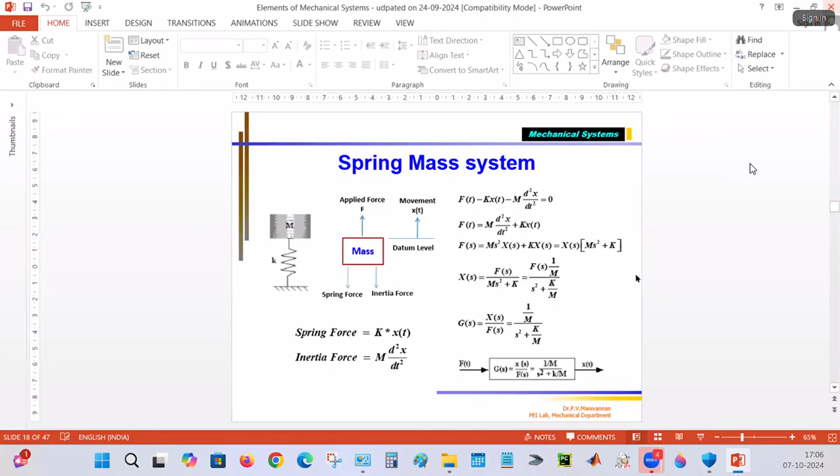Sir, can you show us the previous slides also? This is spring and mass system, then spring and damper system we saw, then this is spring mass damper system. Am I correct? Yes sir, this is the last slide we saw. We just discussed this around the end of last week.

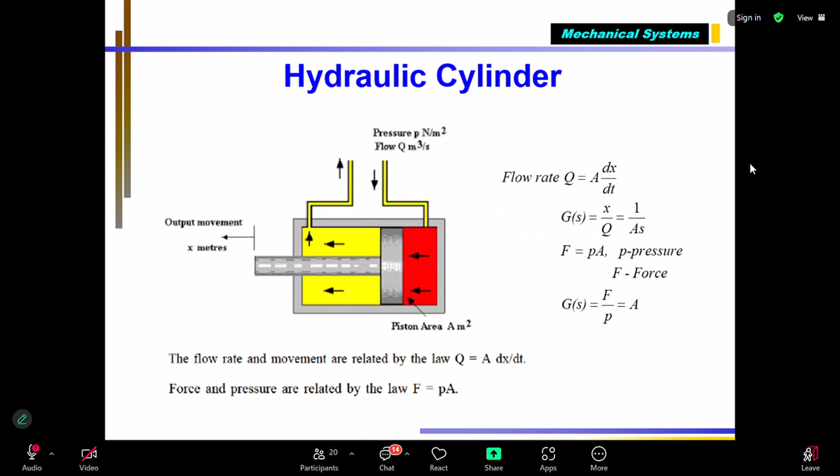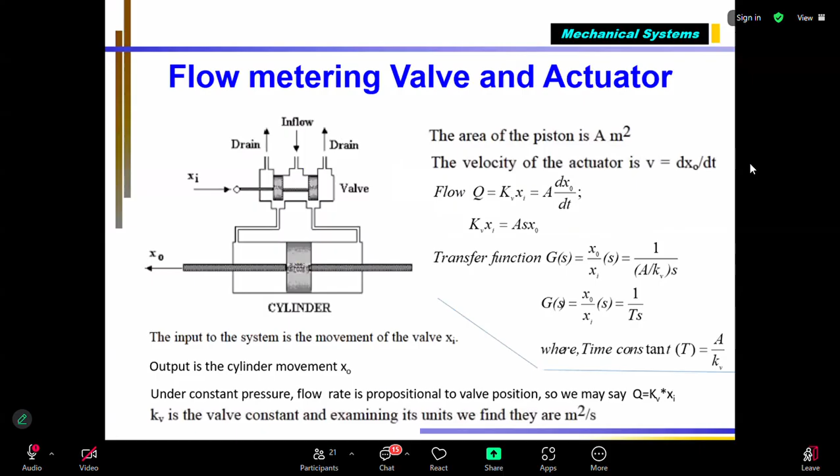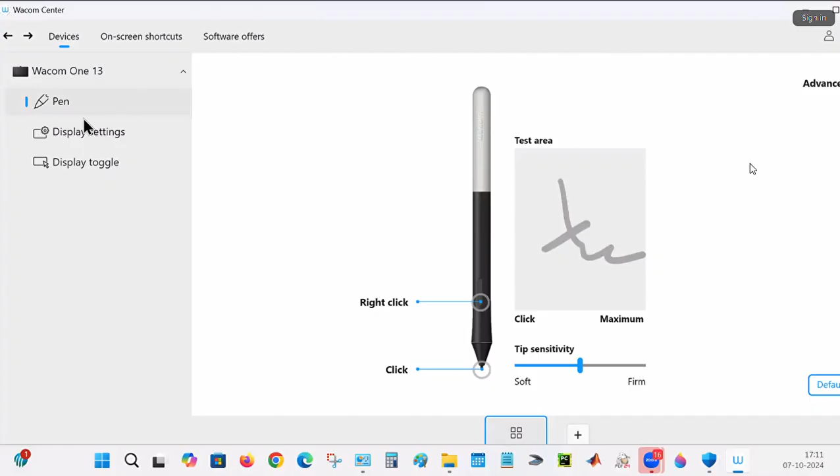Just 1 minute, my pen is not working. Let me close and come back. Yeah, it's working, fine.

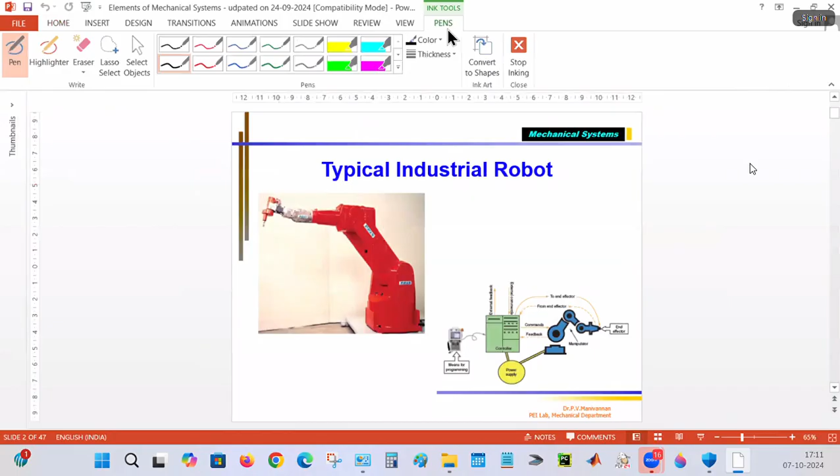The whole idea of the last 4-5 classes is how to model a mechanical system, starting from the basic elements of a mechanical system: spring, mass, and damping element. As I told you many times, if I take a machine and disassemble it into individual final components like bolt, nut, connecting rod, each component can be represented as any one of these - a spring element, mass element, or damping element. We already know the transfer function mathematical model for the spring element, so here we have 3 elements already.

We saw there are 3 elements: one is a spring element with stiffness, a mass element with mass M, and a damping element with damping constant Kd. They are connected in series, and you are applying a force, for example pulling - tensile or compressive force. Accordingly the spring will get compressed, and in the damper, the piston will move from the current location to a new location. Of course the mass will move along with this. So when I apply a force F of t as the input, shown here, the position of the mass element is the output - this is my output, this is my input.

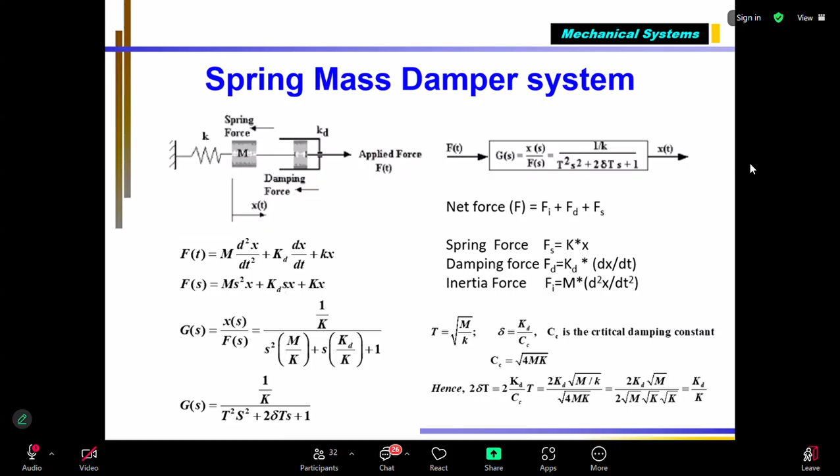Sorry, some small issue there. Visible now? Yes sir, yes sir, yes sir. Okay, so this is called a damping ratio.

This is called damping ratio, not damping constant. Damping constant is the property of the damper that will be given by the manufacturer, or you can find it through an equation. But damping ratio is different. This is called damping ratio.

Damping ratio depends upon all three parameters. You can see here, damping ratio equals KD divided by CC. CC equals root of 4MK. Mass of the system, sprung mass, stiffness, and also the damper constant, damping constant of the damper - all those things decide it.

This is what you will be asked to compute, and then find out the transfer function. You substitute, and you will still get in terms of, say for example, K equal to this much. I say K equal to, say 100, correct? Then M equal to 1000. K equal to this one. The KD equal to say 50 or something, then you can substitute in this equation.

T already we know, T equal to root of M divided by this one. I will substitute here with 100 and here I will substitute with K. Sorry, yeah, first this is 1000. This is 100 and you will find T.

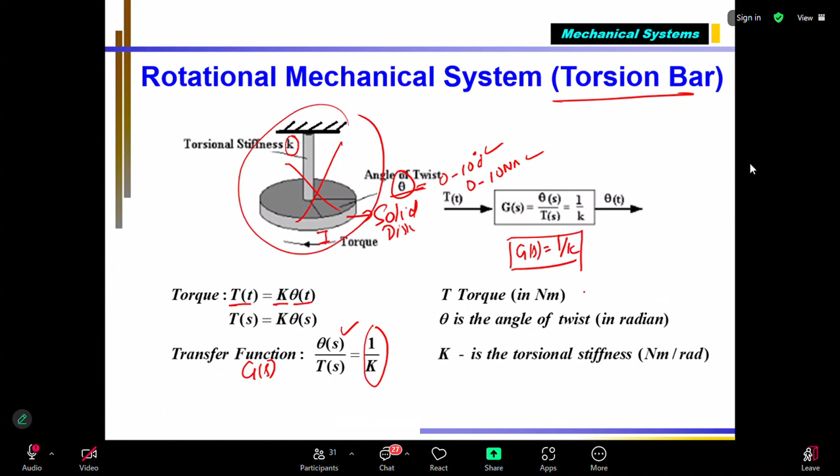This is another example for rotating system. Another one what I want to talk about is torsional damper. Torsional damper is like a damper, and it's a piston type damper. I think in the previous class we talked about piston type damper, correct?

Sir, yes sir. Right, so this is a piston. Yes, air piston type damper sir. Talked about oil type as well. Air also sir, oil also you have. Air can be anything, nothing but a piston moving inside a closed cylinder with a small gap on the periphery.

Correct, these are the gap, and this is filled with oil. If piston input force is given, correct, the fluid from this will come here. Then only the piston could go, because it's filled with oil. Correct, it's incompressible. Air also you can compress only to some extent. After that, the fluid from this will flow at a velocity moving from chamber A to chamber B.

When the piston is moving like this, or moving like this, the fluid goes from B to A. Correct? That depends upon the orifice size, the viscosity, and also the area. I've already talked about the equation for all these things, if I remember correctly. Correct? You can get some example in exam, some problems.

Find out what damping force it created, KD, correct? So similar, that is a linear motion. Correct, damper the piston moving. Instead of that, I have a motor connected to this one. When I give a force, for example a servo motor, if I give a voltage to that...

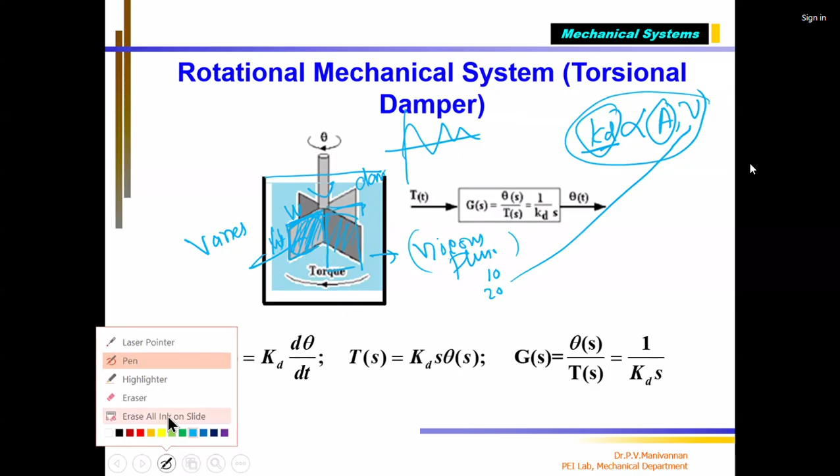Otherwise, if I increase the vane size, make bigger vanes, or add more vanes instead of 4, say 6, the total area gives 8 surfaces or more, and if you add them together, you will get that. If you increase the number of vanes, or make bigger vanes, then KD increases. So this is called the torsional damper, for arresting unwanted oscillations in rotating machines.

So what is the transfer function? The torque is given as the input. KD is the damping constant of the damper. As I told you, KD is proportional to the total area of the vanes, plus also the viscosity.

There's a formula: the torque T equals KD into d by dt of theta, where theta is the angular displacement. This is the time domain equation. Then, I convert by Laplace: T of S equals KD into d by dt, which will become S, and theta t becomes theta S. So this is the mathematical model in the Laplace domain.

This is in time domain. As I've told you many times, the advantage of the Laplace domain is that the differential equation becomes an algebraic equation, so I can easily calculate the transfer function. Transfer function is nothing but output divided by input, which is 1 divided by KD into S. This is the transfer function of the torsional damper.

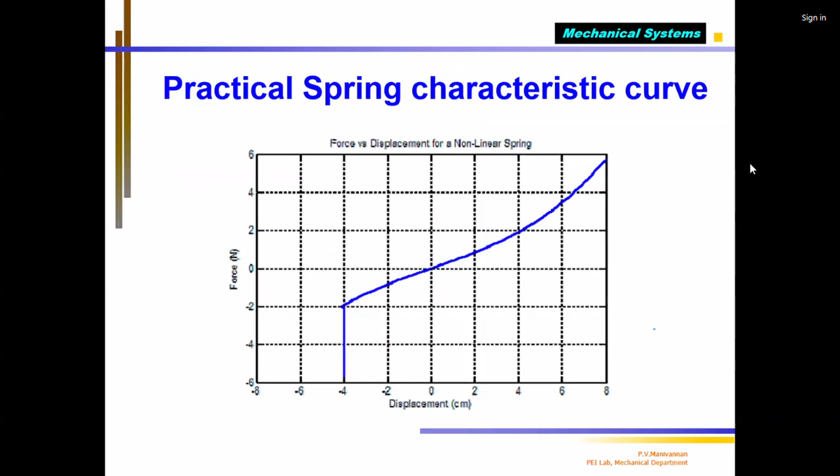Now that we've seen these systems, we started with the mechanical system's basic elements: spring element, mass element, damping element. We saw all those things, their modeling, and individual transfer functions. This is the spring element. Then we talked about the damping element's mathematical model, from which you already got the transfer function.

Then we talked about the mass element. The mass element transfer function we already have there. This is the time domain equation, from which we get the Laplace, and finally the transfer function, output divided by input. Output is displacement divided by input force. This is 1 divided by m s squared, where m is the mass.

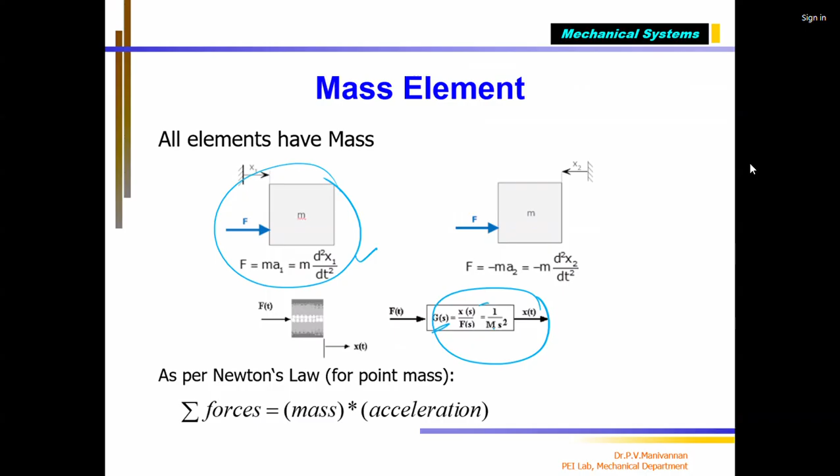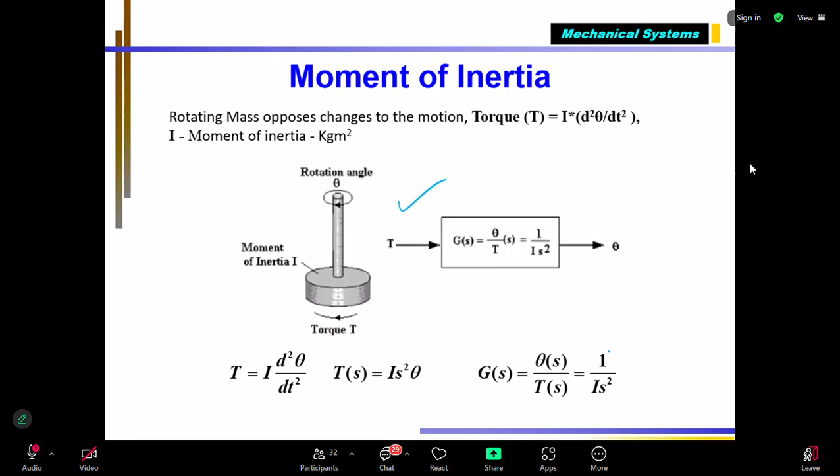So from this, we have built the simple system. Then we also talked about inertia, moment of inertia, and all those things for a rotating machine. So we found the transfer function for the rotating machine, and then we found the equation for this.

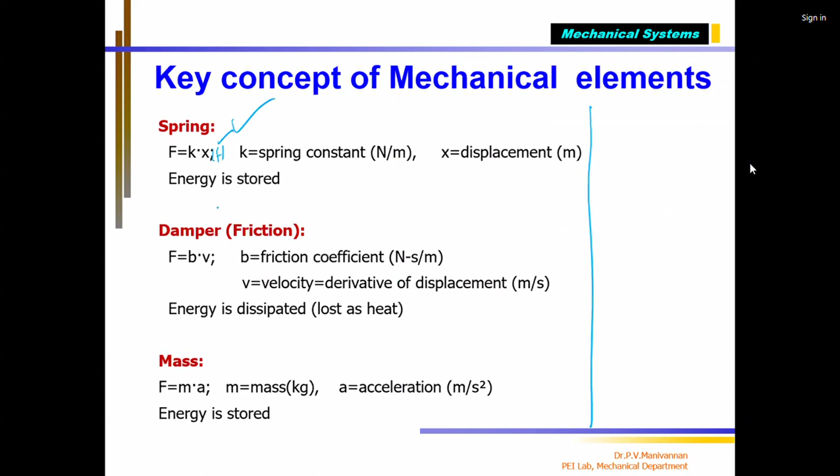Finally, we consolidate: spring element, this is the mathematical model, K into x of t, as already told you, equals f of t, and it is a potential energy storing element. Your damper is a frictional element.

The mathematical model is f of t equal to B... I told you some books use C, some books use KD. Don't worry, they're all the same — different books use different notations for the damping constant: small b, small c, or KD. All are the same. So this model is an energy dissipating element.

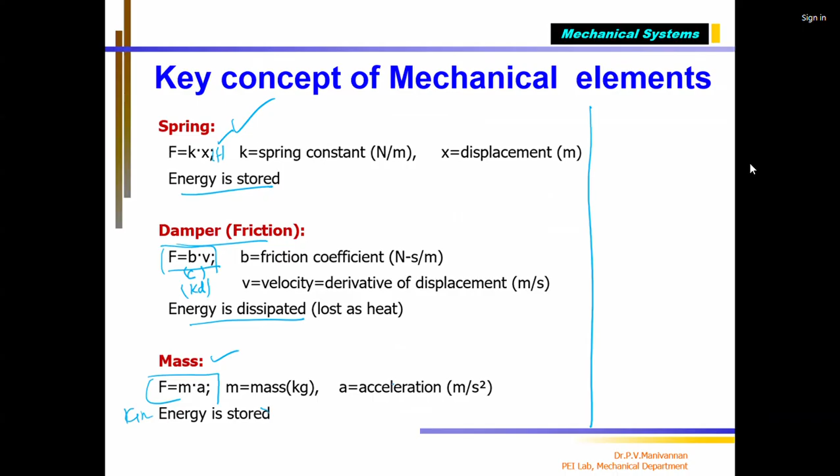Then we saw the mass element, whose mathematical model is m into A, where A is the acceleration and m is the mass of the element. It is a kinetic energy storing device. The transfer function we already saw. From that, we developed a simple mechanical system having only two elements, mass and spring, and how to write its mathematical model.

In time domain equation, this can be written like this. From that, you find the Laplace transform, and then you can write output equal to transfer function multiplied by input. So this is the final transfer function in terms of this system.

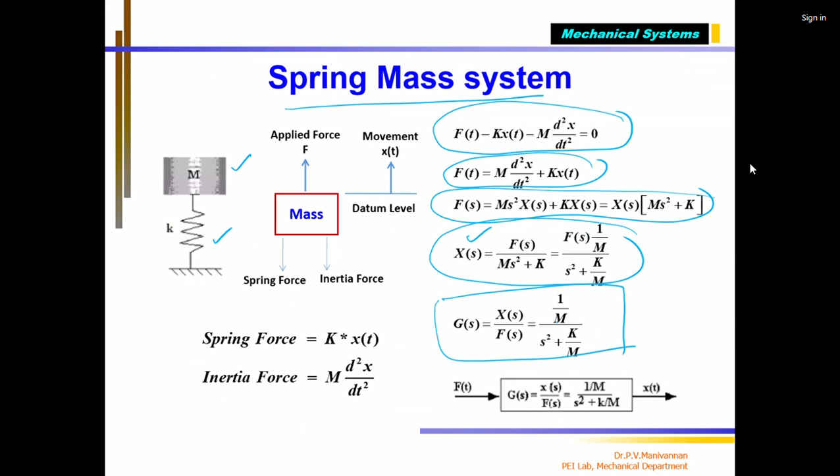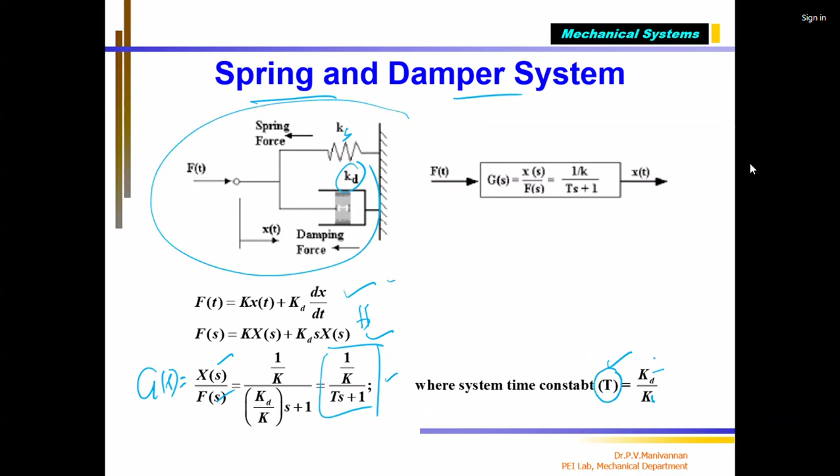Suppose if we were given, draw the correct sketch of a spring damper system, you have to draw this, correct? Write the time domain equation, finally derive the transfer function. When Ks and Kd are given, you can make the transfer function. And if you have to find the time constant of the spring and damper system, you can use the equation to find the time constant, which will be in seconds.

This is called virtual modeling or virtual simulation. What is the advantage? This is called the mechatronic way of designing a system without spending money or time in making a physical system. I will optimize the product, correct?

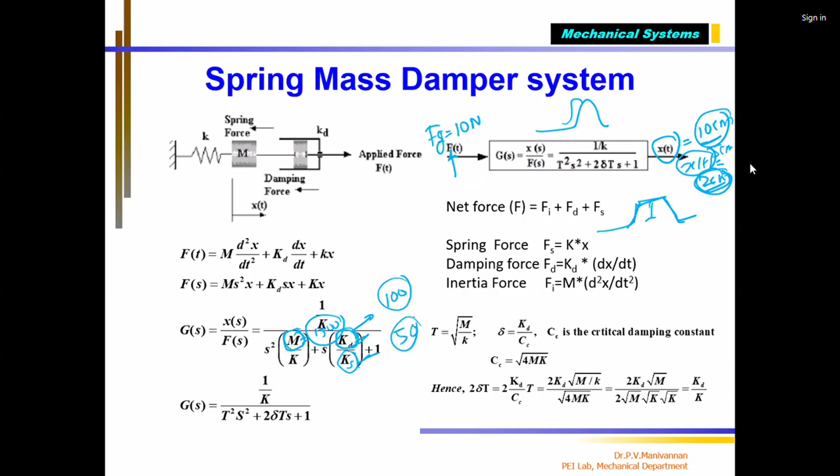If you're a shock absorber designer, you'll be modifying these parameters using MATLAB simulation. Once you find the KD value and KS value for the vehicle sprung mass, you order your subcontractor who is supplying your damper: I want the damping constant to be 100 only, spring stiffness will be 50, correct? You'll say this is what you get, and fix your vehicle. This is what you do as an engineer.

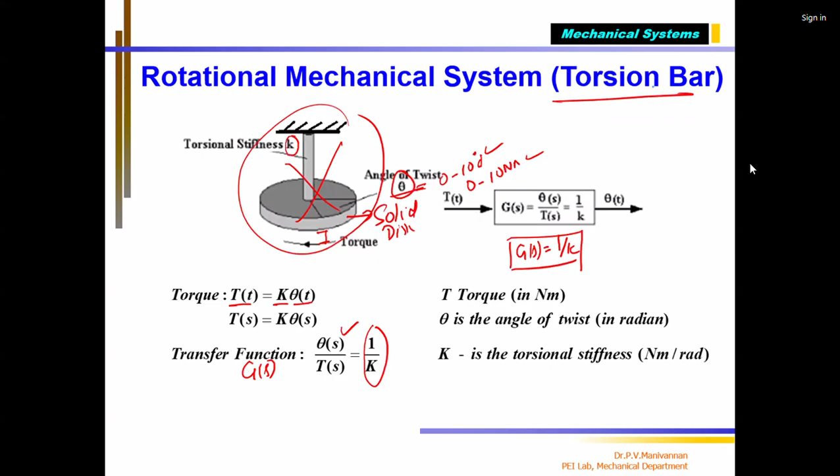Okay, then we saw about the rotational system, torsion bar, how it works, what is the transfer function. Then we talked about the torsional damper, correct? The transfer function we already saw. Till now we saw that.

Now in your mechatronic system, you have actuators also, correct? A mechanical system will not do any work on its own, it needs power, torque, correct? We say energy, power, torque, that is generated by what you call the actuator. There are 3 types of actuators in a mechatronic system: it can be a hydraulic actuator, pneumatic actuator, or it can be an electrical actuator.

Next, if you see a machine, you may have an engine, IC engine, or if it is a plane, it can be a gas turbine. You will see any one of this: hydraulic motor, pneumatic motor, electrical motor, engine, or gas turbine. But right now, these are used in bigger machines. For understanding purpose, we will stick only with hydraulic motor and pneumatic motor. Of course, bulldozers, earth moving and mining equipment use big hydraulic motors generating large power, correct? 100 kilowatt, 200 kilowatt, 500 kilowatt, because it has to move a lot of load, correct, pushing soil, all the excavation. They use hydraulic systems. Pneumatic systems are also used in many factories. Electrical actuators are widely used.

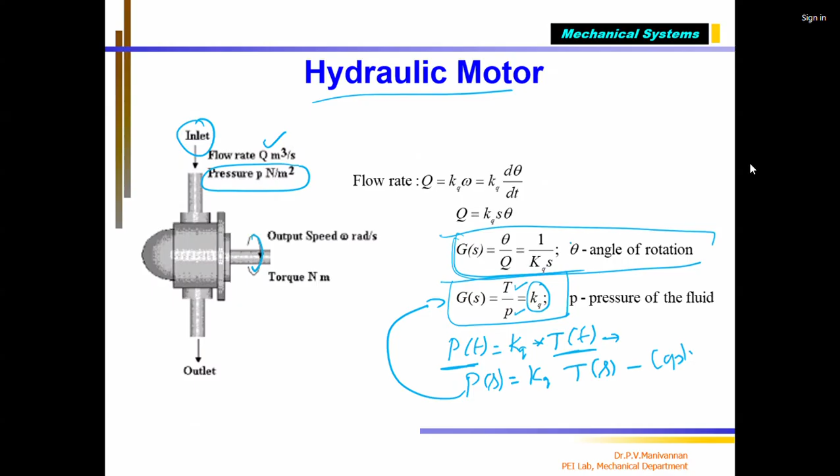So this is the time domain equation. Now I can get P of S equal to KQ into T of S. This is Laplace. From this I can get the transfer function of the motor in terms of torque as output and pressure as input, which is dependent on KQ. This is the transfer function in terms of pressure versus torque. If you want the other transfer function, you will find theta divided by Q. So you can write two transfer functions for the hydraulic motor.

I think time is up, I will stop here. Tomorrow we'll continue this topic on actuators.

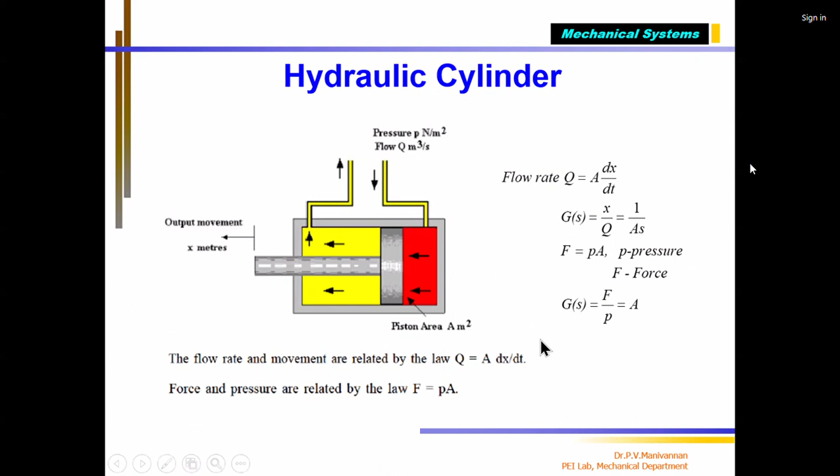Sir, one question - the previous class I requested for the book to refer for the spring mass and damper system. If you can refer it, it will be helpful.

Tomorrow I will tell you. Sorry, because I was caught up on PhD thesis and MS thesis, I was totally tied up for the last 5 days, day and night, so I forgot. Tomorrow I will tell you the book, definitely I will tell you tomorrow. See you, thank you. No problem, take care.